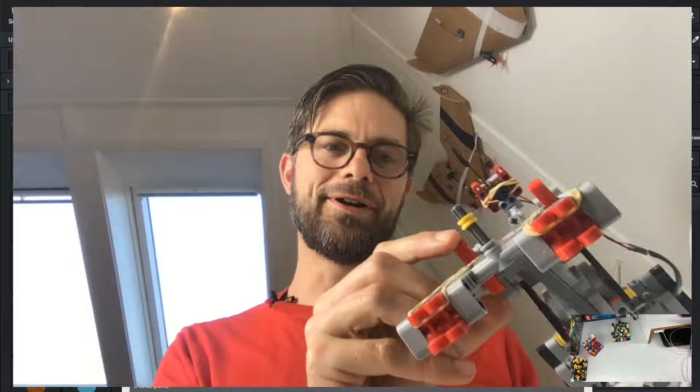We're going to model this bad boy in Studio. It's got these two rubber band cannons that you can fire with a gamepad, and whoops, there goes another one. It's got a camera mount, which is entirely optional but makes for great fun, and there's an iron sight here which works really well for aiming. And of course it's got these aftermarket Omni wheels. They are not original Lego parts, but they make for great movement of this robot. So let's get to it and start modeling this one into Studio.

The first thing I'm going to do is import a palette, and I'm going to import the Mindstorms palette. So I'm going to go not to add palette but to config, where I'm going to import an official Lego set, and I'm going to import the Mindstorms set, which has a lot of parts that are in this robot, so they make it easy to find parts. Now we have a blank canvas here, and let's see if there is a motor in this set.

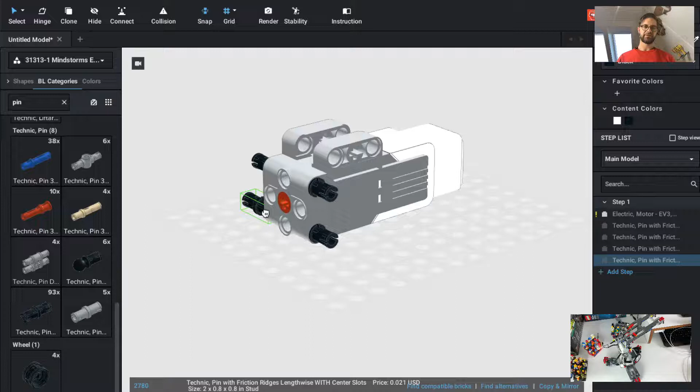So we've got the motor, now let's insert some pins here. Oh, we're in the master palette. Let's go down to the newly imported EV3 palette and find this pin. Okay, let's add 4 pins. So I try to make every step here have one big part and then some pins, and then it's time to add another step.

So I'm pressing Command T, I'm working on a Mac here, or it's Control T on a Windows machine, and now I can add more beams. So let's add a lift arm. Beams are called lift arms in Studio. Let's add a lift arm here, and Mindstorms has them black, but in this model here, you can see in the bottom right, everything is actually dark bluish gray. So let's make it dark bluish gray.

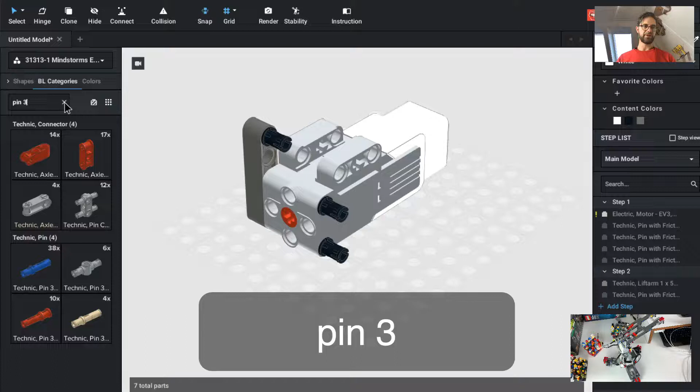And then so again do the same order, first the arm and then some pins. So let's clone this pin here, and let's add a 3 long pin. So I'm typing pin 3 here and adding it.

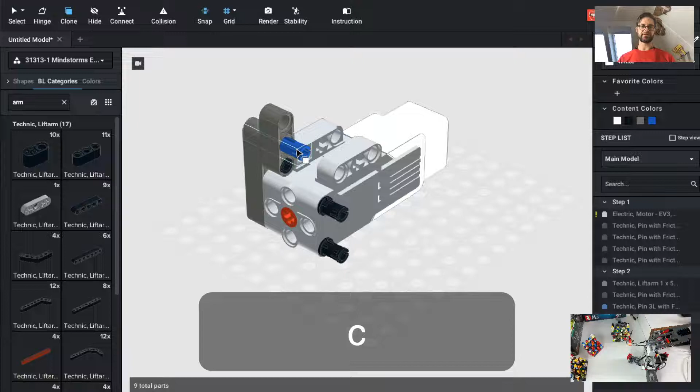I think it doesn't matter. It doesn't matter. So let's make this one dark bluish gray too. So as you start adding parts, this becomes a really nice palette. So we added an arm, then it's time, excuse me, for some pins, and after adding pins I'm going to press Command T for a new step.

Now I'm going to add this angled arm. It's a 3 times 5, 3 5. Yes, that's the one I'm looking for. Turn it, rotate it, okay, it's fine now. And it's not the right color, so let's make it dark bluish gray. And let's add the pins here.

And time for another step. Clone this one and add a pin. And another step, and add a pin. So the next thing we're going to do is add the axle for the motor. So we're going to look for an axle of length 6.

There we go. Then we need a bush. It pays to memorize the names of the parts a little bit, so you can get to them real quick.

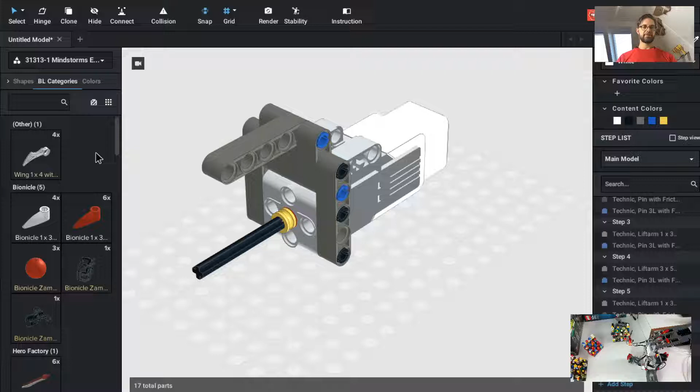That's about enough for a step, so let's add another step, and find a wheel.

Now in reality, of course, I'll switch over to my model. In reality, we don't have Mindstorms wheels, but these Rotacasters or omni wheels. So I'm going to input weirdly colored Mindstorms wheels just to remind us that we need these in reality.

Okay, so that's a wheel, and let's give it some crazy color. Let's make it bright pink. And add a tire here. Let's make that one bright pink too, so we know we have to replace them.

Then it's time for more blue pins. So we're going to build the bracket all around the tire, and we're going to use a lift arm like this and a pin connector.

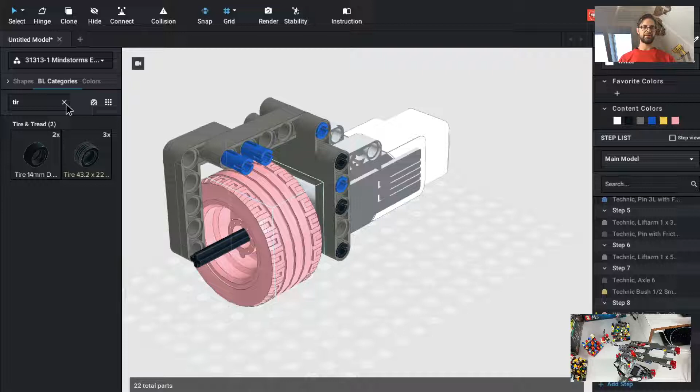The nice thing about importing sets as a palette is that you have the parts in the right color directly, because if I'm looking for a pin connector in the master set, I'll find a lot more hits and they'll all be white. So if I'm taking them out of a set, I'm sure they're in the official Lego colors.

And then here is a trick. So this is the bright red that I'm using for the bracket. I'm just putting in a part here to make sure this content color shows up, and then I'm going to color my lift arm, which is red on the real model. Color it red, and then I'm going to delete this again.

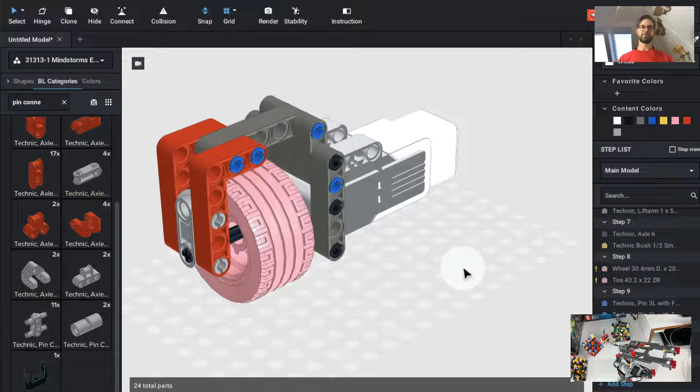I've forgotten to... it's okay. Yeah, this is probably a little big for one step, so let's switch that over to another step, and voila. So this is about right for a third of the robot now.

Next it's time to add some beams. I think they are 9 long beams here, and I have connected the beams with these pins.

Let me find them. In the real model it allowed me to mount it, to assemble the whole thing together, and this looks a bit weird, but it'll make sense later when I slightly change the order to make it all buildable.

So next I need an arm. It's a 9 long arm, that's about here.

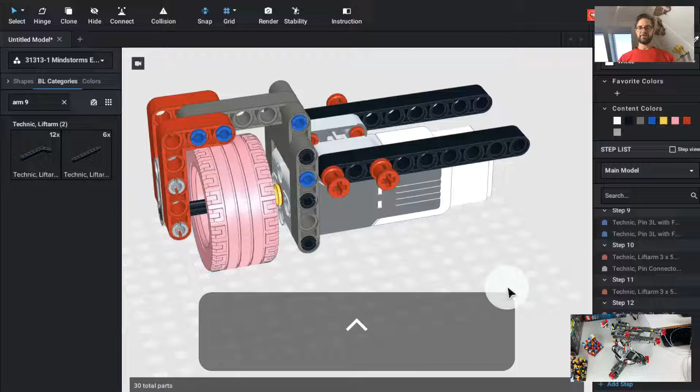Finally we're going to, oh no, not yet. Now we need 2 L-shaped pieces. Let me see how they are connected. Okay, there is 1 space.

This one is probably a little too early, so I'm going to remove it for now. And I think I'll remove these again too and add them later so they show up in the right steps.

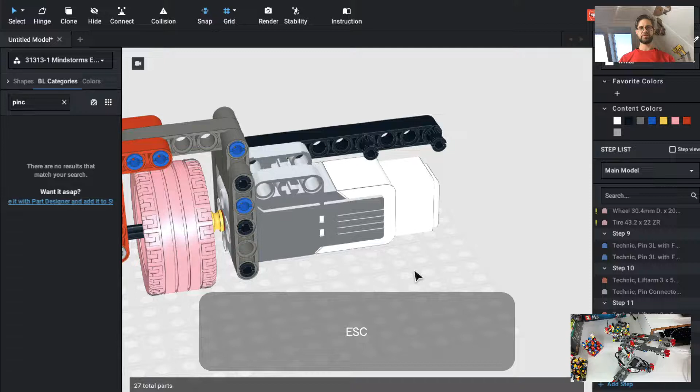Let's find it. Oh no, we don't need a pin. We can just clone. I'm pressing the C key here, the C for the clone tool, and I can clone these pins. Oh, I want this one. Light bluish gray too, by the way.

And then I want another L beam, so I'm going to press C for clone again. Oh, let's rearrange them first. Cool. Now we can clone this safely.

Like that, and the rhythm is beam, pin, pin, so let's add some pins here. Pin, pin. Is that right? Was that my construction? No, it's actually wrong. They're the wrong kind of pins.

I need the pins in the right style. Let me see, do I have another set where they are included? Yeah, they are these kind of pins that should go in there. Let's add this one, and let's add it like this.

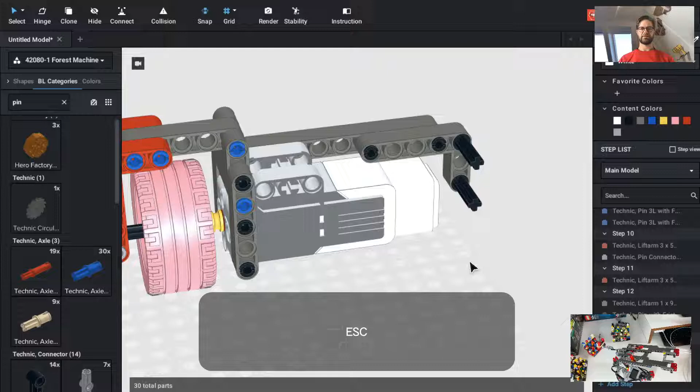Now let's go back to our Mindstorms set, and yes, that's the one I'm looking for. Here, this red one is exactly the right connector. Now I've made a step again. I was too enthusiastic with too many pins here.

What I'm going to do is something different. So let's make this into a... we will never be able to assemble this. We're going to do it differently. From here on, we're going to add blue pins.

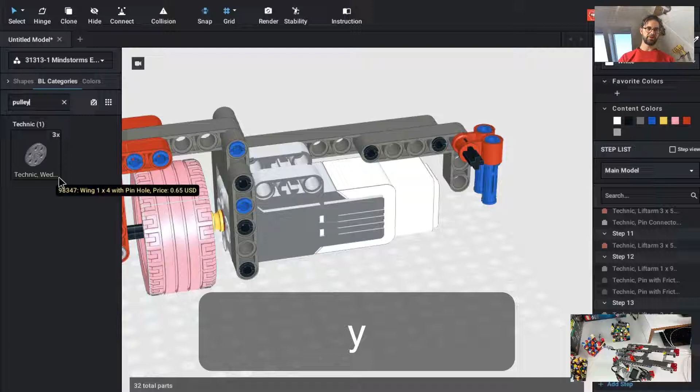And then a pulley, I think it's called. Pulley. Yes, that's the one. So it's a pulley. And there are actually two of them on top of each other. We're going to clone this. Now make this into a little submodel first.

So the user of the building instruction will be prompted to assemble these two parts first, and now we're going to clone it and turn it around and connect it to the model like this. I think we have made some alignment mistakes.

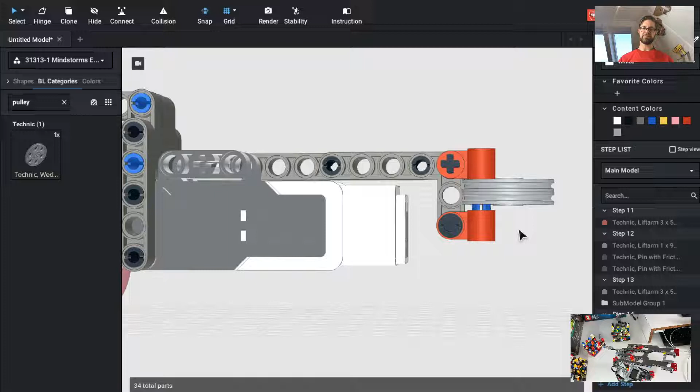Oh no, it's okay. This one could be a little down. So I'm pressing the T key here where I get this transform tool. And I see that my grid is pretty coarse, so I'm going to use a finer grid to put these into place. It's still too rough. An even finer grid. Yes, that's where I want them. Okay.

Pulley. Let's add some more blue pins, because we actually need 6 of them all around, because the nice thing about these pulleys is that the holes are spaced in 120 degrees or 60 degrees per hole, and this is a nice basis for our rotocaster.

Hi Connor, nice to see that you joined, and hi Joshua, thanks for joining.

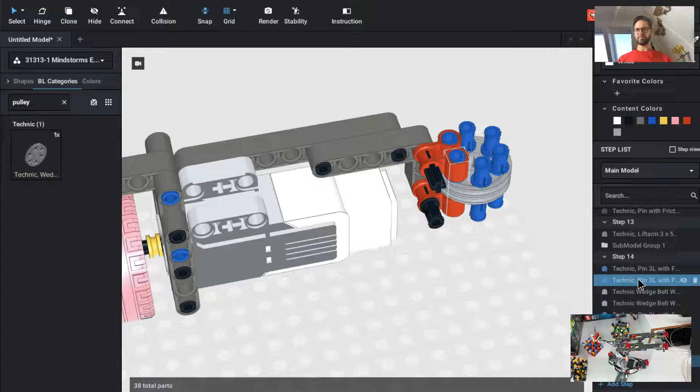I think it's about time for a new step. So we have these pulleys with 6 pins in them. They make for one fine step, and then we're going to add these things, these little submodels. I'm going to add both of them in one step, make another step, add 2 more, see if I can align this.

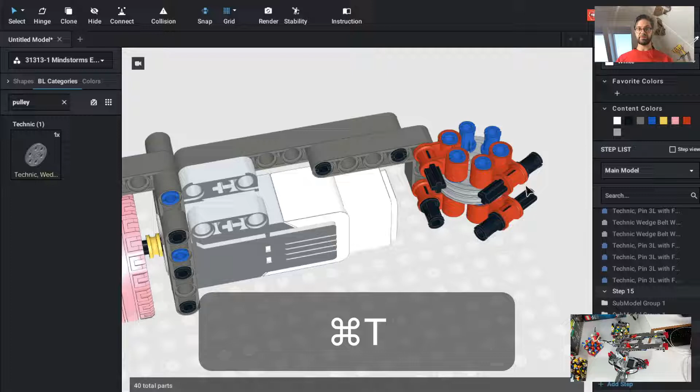Now I'm pressing the R key for rotate, and I'm going to rotate it to a whole number. Yeah, I think it's about right. I'm going to make another step and then clone these again.

Oh, it lost its 60-degree angle. Let's maybe clone this one, try and flip it around. No, it doesn't want to flip in exactly the right way. So I'm going to use this one as a clone source, and rotate it in place.

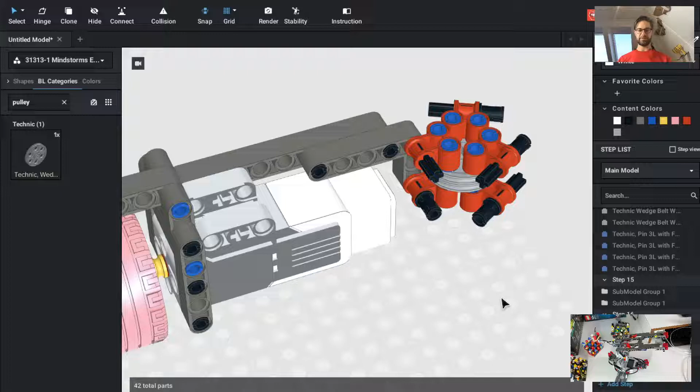60 degrees, that should be about right. Okay, so these are all set, and then we can continue this one, this L beam. Let's add another one, and now we're back into the rhythm of beam, connector, and then new step, this one. Okay.

And I now discover that I forgot to combine our first assembly here into a submodel. So I'm going to select it, make sure that these beams aren't part of the selection. Yeah, so this is the first part. It's a repeatable part, so I'm going to create that into a submodel, and I'm going to call it motor assembly.

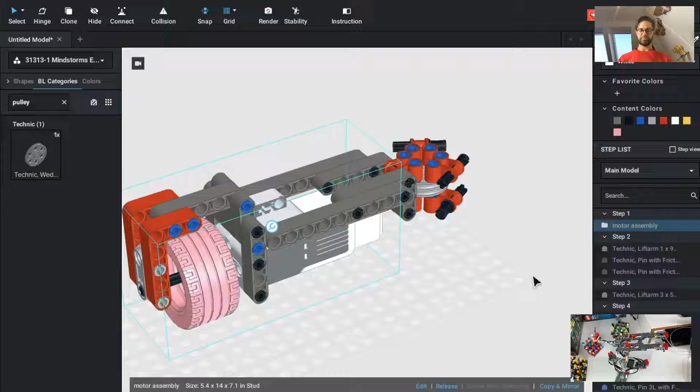Okay, and actually about now is the point where I'm going to add this assembly, so I'm going to rearrange it right away. We'll end up with an empty step at the beginning, but that's fine.

And actually we can make these into a submodel too and clone them all around. That will really shorten the building instructions. So let's create them into a submodel. I don't usually name all my submodels, and let's create this one into a submodel too.

Okay, so then after building this, I can start building that, and we're just going to clone it. Let's see, where is, okay. We're going to clone this one first. So in this situation, it automatically aligns nicely.

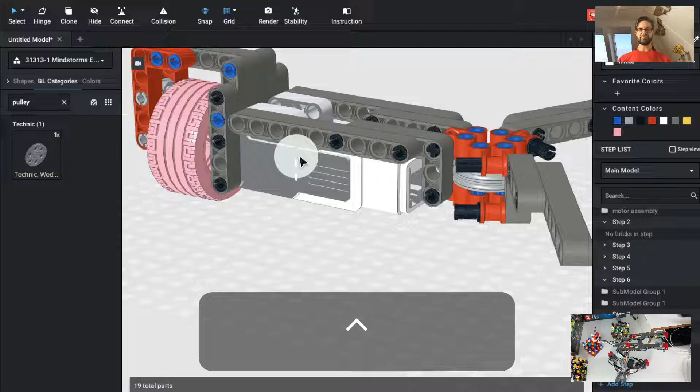So if you clone 3 identical sub-assemblies in one step, in the building instructions, I can actually show that it will instruct you to make this submodel thrice. So let's do the other one first, and then I'll switch over to building instructions real quick.

Okay. Now let's show you what happened here. Here we are instructed to build this assembly thrice and then add it to our central hub, and then we'll be instructed to create this assembly thrice and add that to the central hub. So this really simplifies the building instructions.

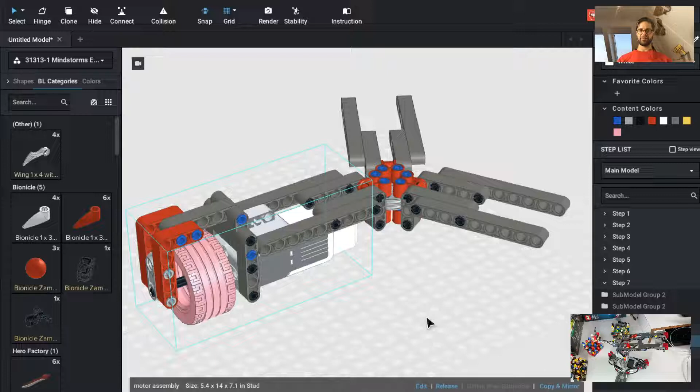Now is a good time to add the motors. So this one, let's - oh, I could have just dragged the step including the model to the end. So, and in this step, let's remove step 9 for now.

Now I need these 3 long pins to actually connect the motor. Let's do that again, and I can just - while building the model I can do the pins first and then the motor. In the building instructions it won't matter because it's all inside the same step, so the user then has to figure out the best way to add these parts.

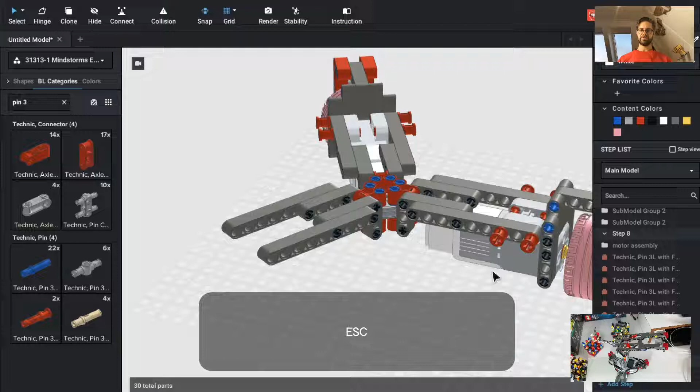Okay, so now we already have about 2/3 of the omni-robot. I'm pressing to drag it around. I'm pressing shift and dragging here. And the last one is going to be - the third motor is going to be a little different. It's going to be assembled with these pins.

Oh, I think actually for ease of use, because these both are angled and I won't be building much on top of them anymore, I'm actually going to move this motor over here, and it'll save me a lot of trouble later on. When I add the EV3 brick, it will be orthogonally aligned to the floor here, to the grid. So I'm going to move this motor over there, so it will be easier to add the EV3 brain later.

Oops, I cloned it. I shouldn't have. Should have just moved it. Okay. So that's a fine step.

Now the last motor, and the last motor I'm going to put it in a new step because I'm going to assemble it with the blue pins, because I'm going to add some fortification construction on top of it. So here goes the third motor. Oh.

Just trying to snap it in place. Okay, it snapped. Cool. Now let's have a look at the model. So now we have the bottom side of the model more or less, and now it's time to build the brick here on top.

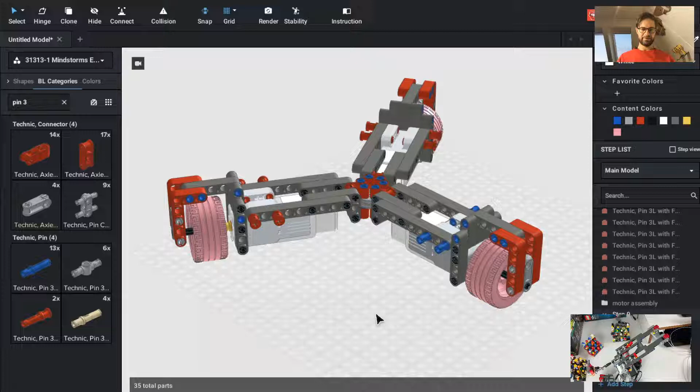I remember when I designed this model that I built the brick with this kind of axle because it has the ability to push it in all the way, and then the round bit will stop it like this. And...

How did I connect it then? Oh, it should actually be in another step, and it should stick one out, I think. Oh yeah, should stick one out like this. Yes. Okay, and let's look at the model.

How did I ever connect this at the bottom here? I guess I'm going to disassemble all of it just a little bit. I put 2 five-long beams in there and a piece. Okay, that's a weird construction, but well, let's stick with it. It works.

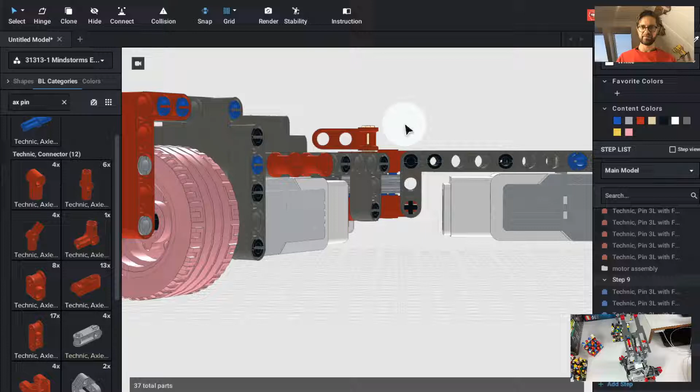Now, because I used an axle here, the alignment is a little tricky. I want everything to be in the right height. Yeah, you can see already that these aren't very well aligned. But I think it will work out, more or less. Yeah, I think it's precise enough for the building instructions. So let's make it light bluish gray and...

Put it in a new step. Add some blue pins. Now we're back into the rhythm of beam, pins, pins. So we're going to add a 5 long lift arm. And...

Next we have to add the frame. So let's add this and that. Okay. Yeah, we could actually have added another pin here. Maybe it'll make the construction a little stronger.

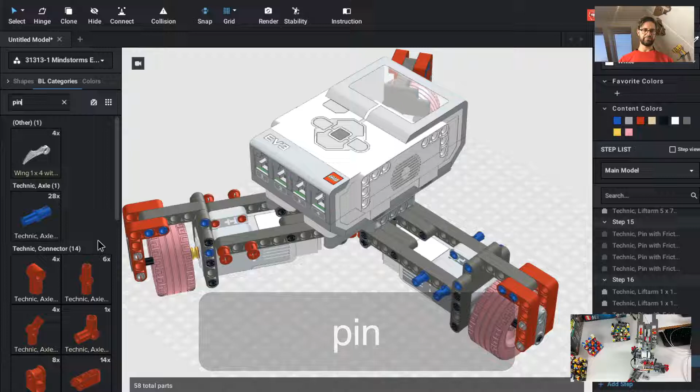Come on, go in there already. Yes, there you go. So we're part pin, pin, pin again. Add another step and have these, going to add these red pin connectors. Okay.

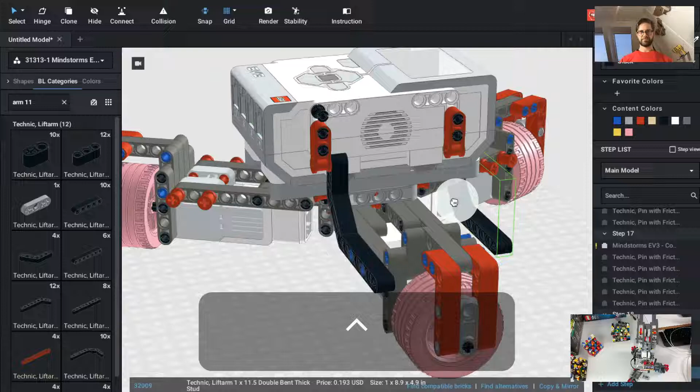And then I'm going to add the big L-shaped beams, so arm, I think they're 11.5. These guys, yes. Oh, rotate it. There we go. They exactly fit in here. That's why I chose them originally. I only have to make them in the dark bluish gray.

And finally I have to insert these little axles here. Okay, so now the brain is connected a bit better to the base. Let's see what the other side does. So let's switch over to model view.

Here I did something to connect it to the base that seemed to align, but I needed a half step there, and it's 10 units apart. So we're going to insert these gray parts first, then build the rest on top of it, and finally use the red axles here to assemble everything, I think. Or maybe, oh no, we can use these parts to assemble it all and just add them for now. Okay, there we go.

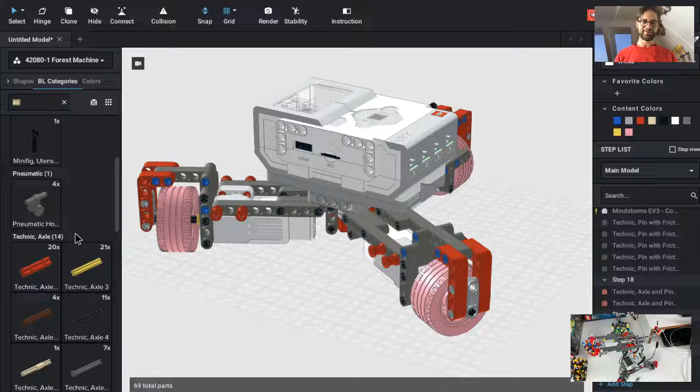I imported more sets, almost all the sets I have, and I seem to have a bit of a memory as to which bricks are in which sets. So this is much easier for me than just searching the master palette. Let me see if I can find this. Yes, that's the one. I remembered it was in the forest machine set, so I could find it really quickly.

Okay, I should have put them into a new step. So let's drag them around to the next step.

It's good to see that you're so enthusiastic, Connor.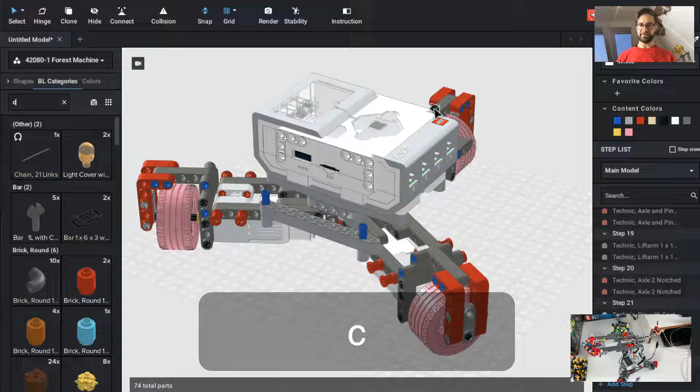And then we need some black pins again, so I'm going to steal a black pin here from the back side, or clone it. Let's go back to our Mindstorms base kit, and we need something that connects axles and pins, with a half step—that's the one we need. Need 2 of them.

What else? Yeah, they will have to be built with sub-assemblies. So what I'm going to do now is insert an axle. In reality you won't be able to do it, but for the building instructions it will be just fine.

Next we need a part like that. I actually wasted some time doing this—I could just have cloned it. Let's align it a bit better. There are some view shortcuts. Yeah, that's the one, I guessed right. So here I can drag it around with shift and everything's aligned. It seems to be well aligned. Maybe this axle could move a little notch in there. Yeah, now everything is fine.

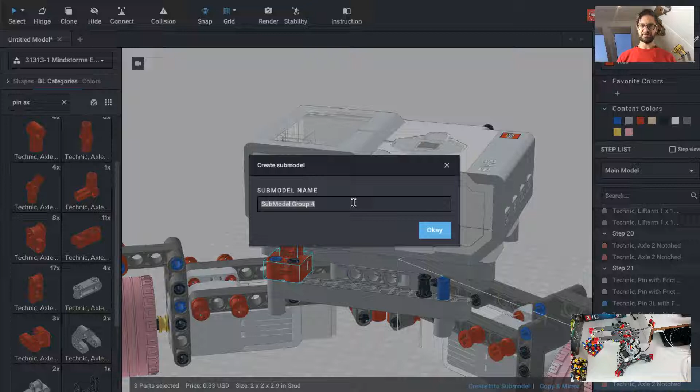So this is a great submodel now, and I'm going to make it into a submodel and clone it. Okay, and then I'm going to put them into their proper steps.

Let me see what kind of pins I put in there. I'm going to put the black ones in right away. And then here I have this very interesting submodel to build that I'm going to snap in afterward. It's built with a pin axle, and a black one, and a half beam. Are there any thin beams? Yes, exactly what I need—they are just in the Mindstorms set. 2 thin beams. And an axle.

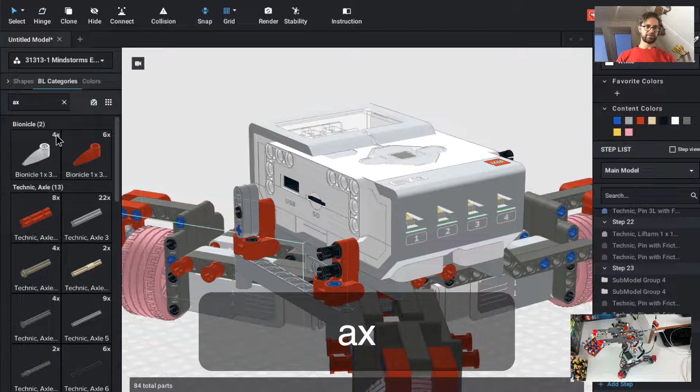Okay, add a step. The fun thing is I can make this part with separate steps here, and when I make it into a submodel it will retain the steps, so that will save me some time too. I'm going to—is it, yeah, this one, that's the one I need. Voila. Beam, and clone the black one.

Now all of this I can select here on the side. Oh, I think for you this model view is on top of it, but I'm selecting all of the parts I just built here in the sidebar, and I'm going to create that into a submodel. So in the instructions, the user will be instructed to build that first and then stick it in from the side.

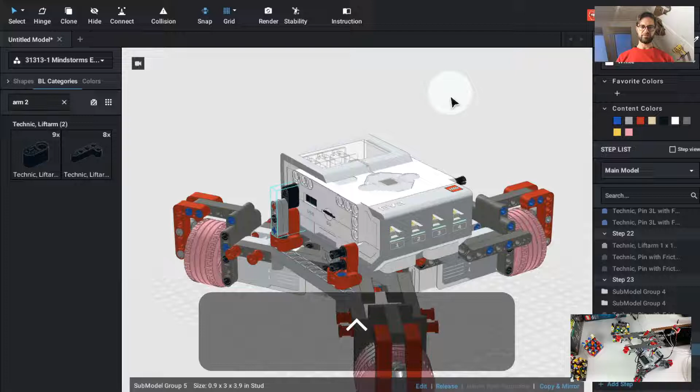I think we're about ready to start with the superstructure now, and maybe it's okay to start building the superstructure from this side. So what we'll do here is add the L-shaped beam. No, let's clone a pin from here.

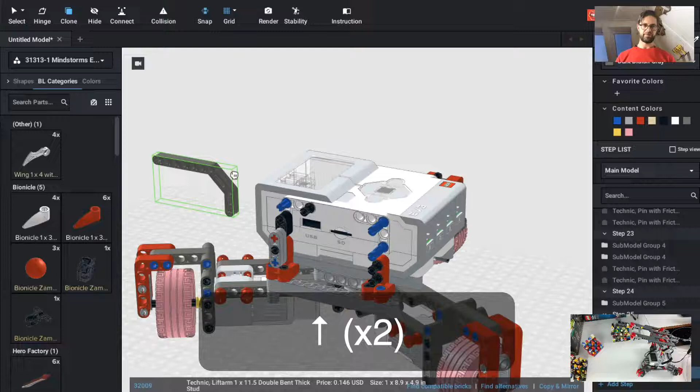And the other pin. And some 3-long pins. Maybe I can clone them from here. Yes, I can—these are the ones I need, so let's clone them. Try and rotate them until they are in the right direction. That's what I want.

And then we need—oops, my Mac is going into night shift, let's disable that. I'm going to need this pin connector that is angled. I'm not going to find it like this, can just scroll. Oh, apparently it's not in the Mindstorms set where I supposed it was, so let's try and find it from the master palette. Pin connector, where are you? So it's this pin, but then angled. Yeah, that's the one, that's the one we need. And we want everything to be light bluish gray.

Voila, and then this one is going to be another submodel, a nameless submodel. Oops, I selected too much—these shouldn't be in the submodel. Okay, another nameless submodel. There is an empty step here, going to delete it.

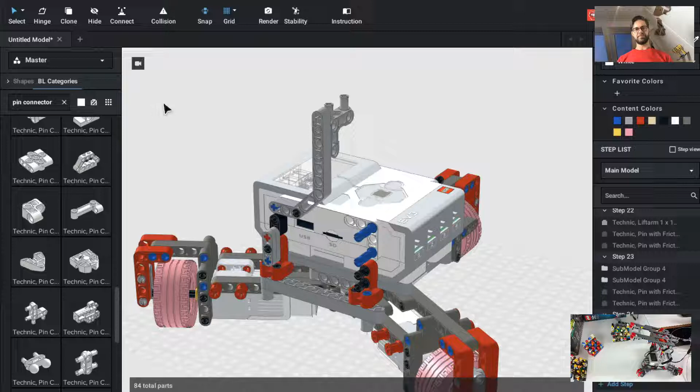So this is part 1 of the superstructure. I think the next one is a 13 long beam. Let's select light bluish gray here, because we're going to use a lot of light bluish gray. No, that's not the one, it's an 11. There we go. And let's seal this up with a 5 long beam.

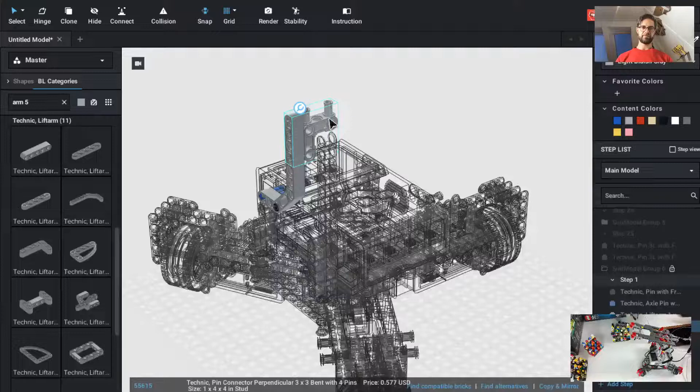Voila. Now this is a bit much for one step, so let's make all of that into new steps. This one can have another one like this. So we can go in there, copy it, go back to the upper model, paste it, insert it, and it should go with the lift arm here.

Now the other side, I think we're going to add 9 long beams. So let's find beams with a 9 length.

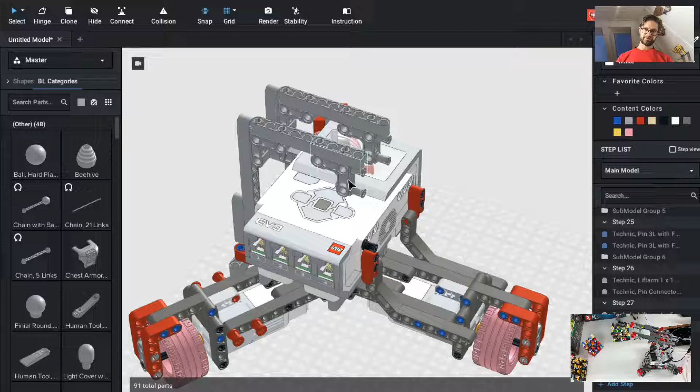But anyways, we were adding lift arms here, and I think in the same step it will be okay to add these 4 parts in one step. I think the average builder can do that. Oops, they shouldn't be there, they should be here, right at the end.

Okay, new step. Then we need a 9 long arm, if I counted well. Yes, perfect.

And we need an almost mirror image of this one. What we can do is copy and mirror it. It will give us this, and the pin connector here is surplus, so I can just delete it here, and I'm still getting this sub-assembly, which is perfectly fine to put in there.

Okay, we're making way with our superstructure here. I think right now it's time to add the big motor, so let's insert the pins to do that. You can clone them from here on the side again. Press the C key for clone.

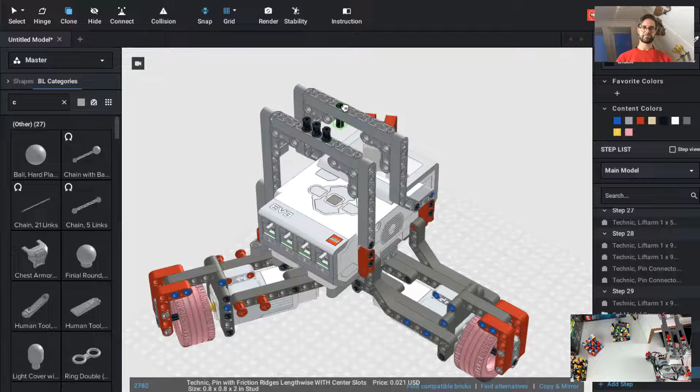Okay, new step, going to the master palette and select white, and find EV3 again, and then we can scroll down until we find the motor. That's the one. Okay, High Pro Skills, welcome to you.

Ouch, this one doesn't align. Let's see if we can zoom in and make it align. Yes, now it snaps. Sometimes it's weird and you have to zoom in and change your view a bit until it snaps. But here we are, ready to build the cannon.

Let's first fix the cannon here to the frame. Let me see, how did I do that? I think I used a 7 long axle and a 15 long beam.

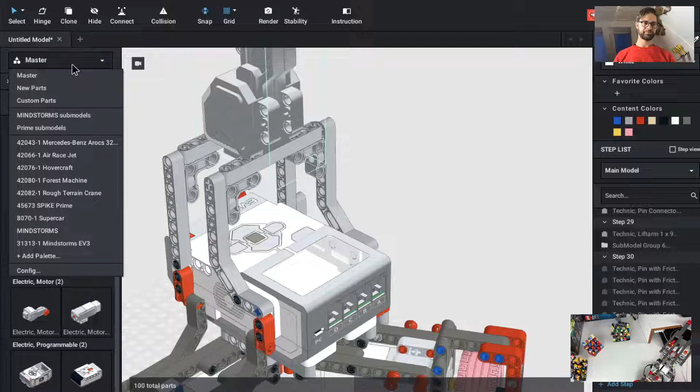Back to our Mindstorms palette. I'll just insert it horizontally and then rotate it. So I'll switch over to the model.

As you can see, right now I'm building this part. So I'm going to start with the axle inside here and this beam, and then I'm going to add these parts because they are connected to the red ones, and I need the axle first. There we go. So I'm just going to rotate it out of the way a little bit for now.

Axle arm, new step. Pin axle, so that's the one. These are the ones I need. Rotate them.

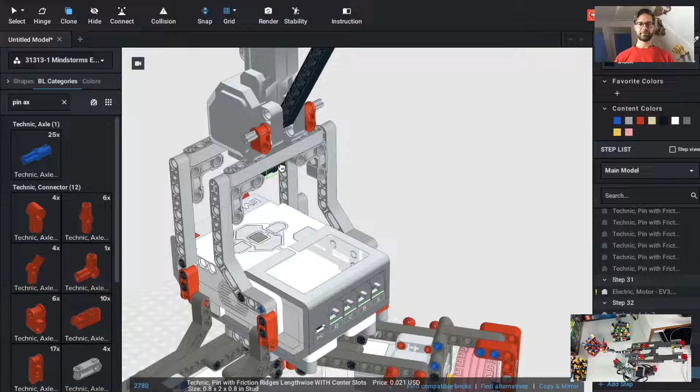A bit of a precision alignment. I wish the grid was more helpful here, but somehow for the Mindstorms model it doesn't really work. Then we need some black pins. Let's clone one from down here again. New step. I think I used 5.

This is actually, I will make it into a submodel again, so I will build it only on one side and then clone the whole thing.

So let's make more pins. I need a blue pin, a long one, to go in here, and then I need another arm. And in my design I use the red one. You can of course use any color, I just like red here.

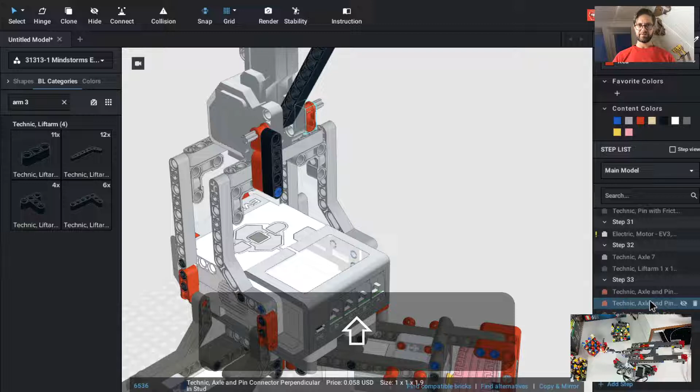And then I can clone all of this. Clone all of this and first create it into a submodel and then clone it, and voila. Now the motor is connected to the base.

What else are we going to do here? We're going to, yeah, I think I'm going to start here on the back for the gun assembly. So let's switch over to the model again. So I think the next thing to do is build this thing on the back, and then when I've built it out wide enough, I can connect these half beams and the rest of the superstructure.

Let's see, where do I start? I really forgot how I built this, so I'm going to take it apart.

Yeah, that's about far enough to see what I did. Okay, new step.

Let's find a blue pin to start. Okay, next is a beam, a lift arm. That is a lift arm, and this lift arm, oh, this one should have been in the next step. I decided to take a gray lift arm there, like this.

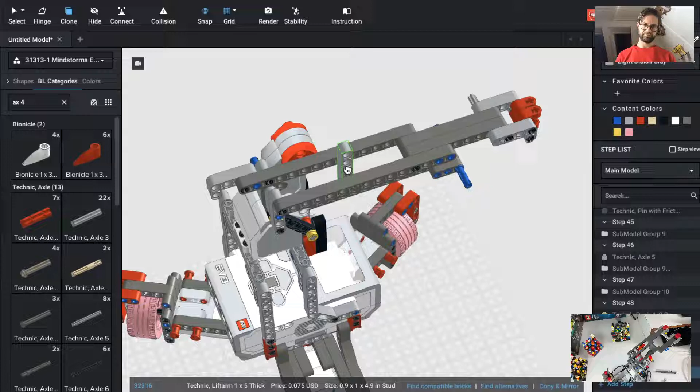Press the T key to move it into place, and press the C key to clone the bush. Okay, the steps will be ordered wrong, but we'll fix that later.

Yeah, I think right now we can go on to the other side. So let's make a new step and clone everything to this side.

Oh, accidentally. Okay. No, that was not the right thing to do. First, we need to build the cannon holder. So I'm going to clone this.

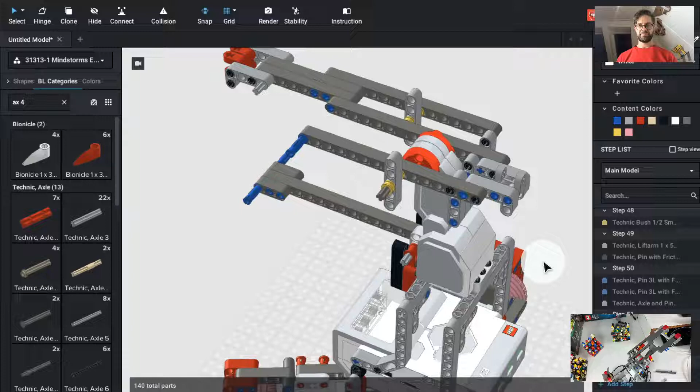Let me think, what's next? Oh yeah, the gray L-beam. So, new step, more blue pins.

I should have made a new step. A new step, again here. Come on, it doesn't snap. Yes, there we are.

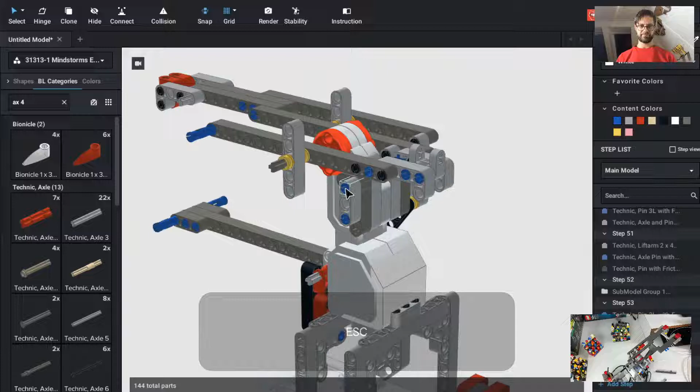New step, clone our three long beam. So this half of the model goes much faster. Add a, oops, not this one. Add a blue pin. And, oh yeah.

New step, build up this part again. No, too fast. We should have made the X pin connector first here to build our iron sights.

Okay, there we are. I like to have this one in gray, and I want another X like this. No, just not clone it. I need to copy it, then leave the submodel and then paste it in the supermodel.

Yeah, that should have been a new step, I guess.

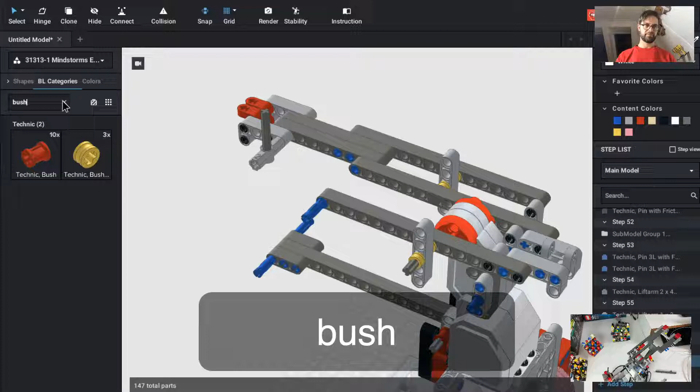Now we're going to use both a gray bush and a yellow bush, and the gray bush will fix it in place and the yellow bush will be our sights.

Okay, and then we can add a new step, add in a 5 long axle. Make a new step, and now it's time to build up this side.

Oops, no, not yet. I should have copied this one first. This one can actually go together with the axle. Finally, this beam.

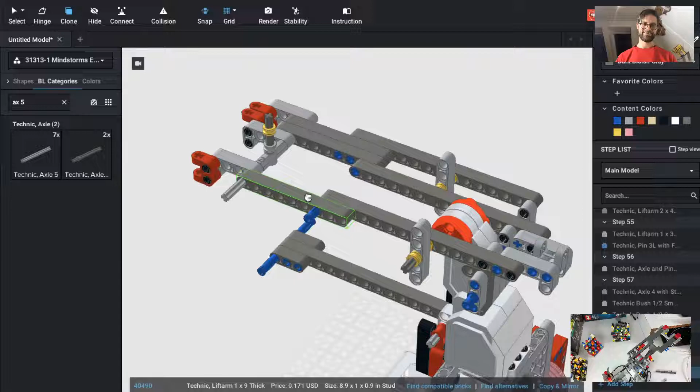Was that a black one? No. Let's move this one back slightly. Add the black pin that should have been there. Okay, and the black pin should be in the previous step. Cool, now some blue pins.

Another 9 long beam. Oh, I forgot to make a new step. So let's drag it into a new step. A black pin is a good thing to insert there.

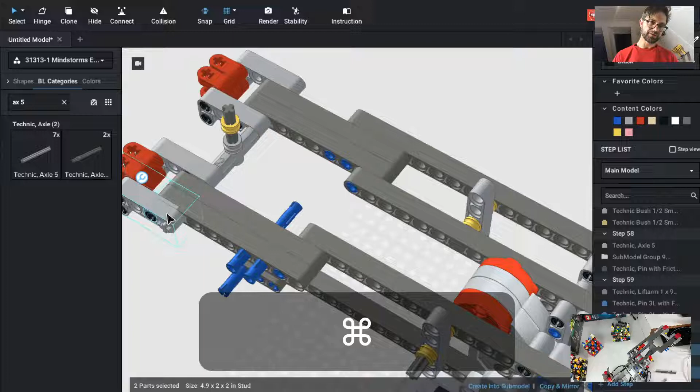And then we can go for a new step and a clone of that part. Yeah, it should snap. I wish it would snap better. Ah, I guess my black pin wasn't positioned right. Okay, yes, there we go.

And then finally, I think we will copy, clone this here. There we go.

And now we have a problem again. Let's solve it later. X6, let's first input this camera axle.

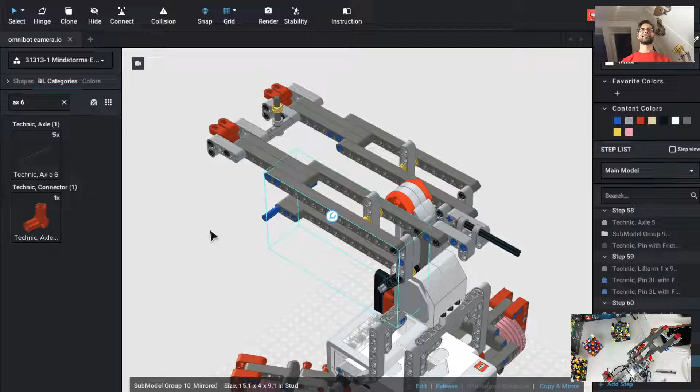Now we have the problem that these things here can't rotate anymore because they're in a submodel, and I need to rotate them. What I'm going to do is save my model. I hadn't saved it ever, that's pretty risky. And see if we can release it and release that one, and then see if we can rotate it.

Nope. Nope. Awesome, the whole thing moves. Okay.

How far up should it move? It's about this far. Okay, now let's rotate this one. This sucks.

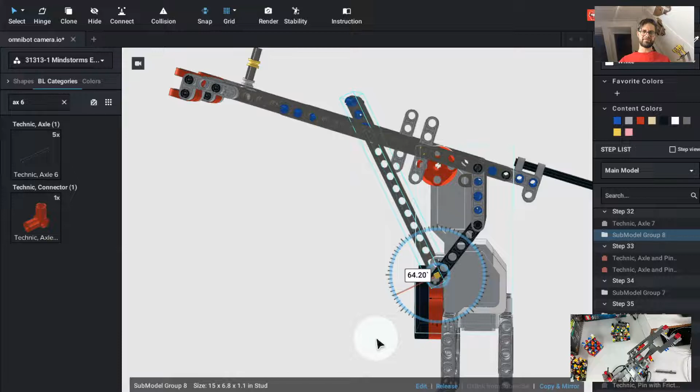Let's take a side view first. Not this kind of side view, that kind of side view.

Now where did it go? Oh yeah, it went into the backmost blue. Oh, we went up too high. Yeah, I think it will end up there. Let's rotate this one again.

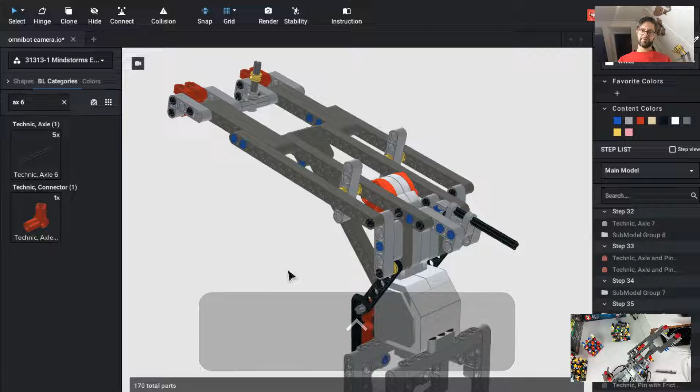Okay, and then I see another mistake here. I wonder what happened. This one should have been there. Okay.

Okay. Looking good, it's already starting to look like the virtual reality robot that we wanted to build. So let's compare it to the model for a bit.

So it's looking pretty much like it. So now we need to make this part of the trigger and the camera cradle, and then we'll be done. So the last bits, and we've been modeling for about an hour and a half now, which I think is a fine amount of time.

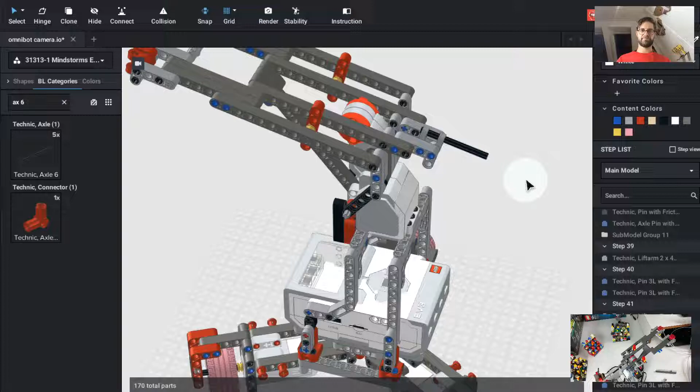Good. Oh yeah, I prefer these to be red. What's next? Oh yeah, a little bush here would be nice. And the camera cradle.

Step. Was it the number 4 that I used? I used the number 3. They aren't in the Mindstorms set. Axle pin connector angled number 3, that's what we need from the master palette.

Let's make it light bluish gray. Axle pin angled number 3, that's what we need.

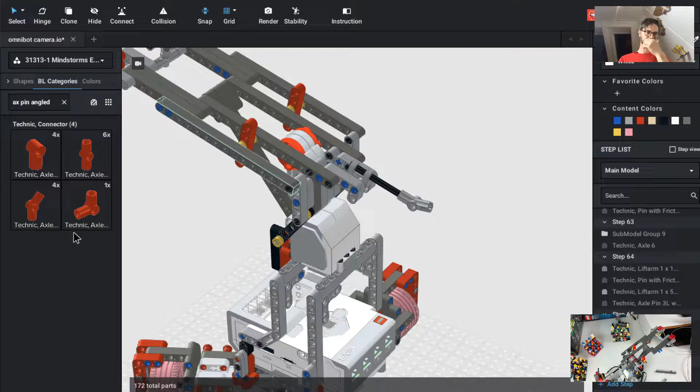And now we kind of go back to Mindstorms, because we need a 2 long axle. Okay.

And then I don't know the name of this part. What's it called? Axle connector with axle hole. Well, whatever. Oh, I should have put this one into a new step.

And edit all, copy, paste it here, and it's a gray one, and all of that should have been into a new step.

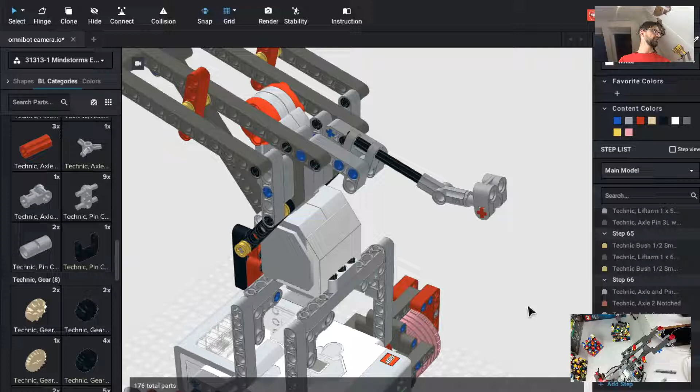Yes. Nope. This one should go out. These two should be in the same step. Yes. 2 blue pins.

Ah, they're angled, so that's not so very practical. Let's clone them from somewhere else. Let's clone them from here.

Okay. And let's add some pins.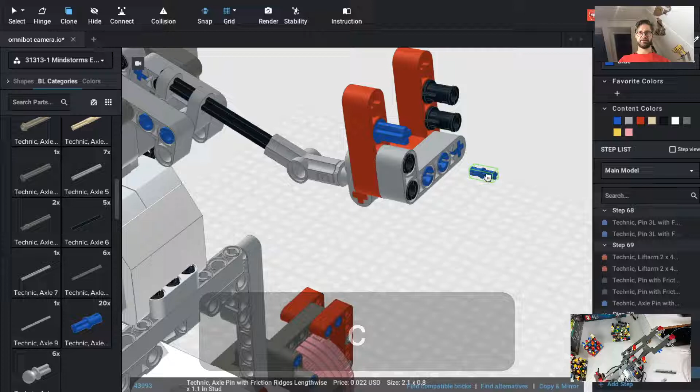Now let's make more pins in there. Copy of this one. Okay.

Almost there, and then from the master palette we need a pin. Is there a half pin? Pin with a stud. Oh, what's it called? Yes.

Okay, and then finally we need a tile, I think it's called 2x2, and a 2x2 tile. That finishes our camera cradle.

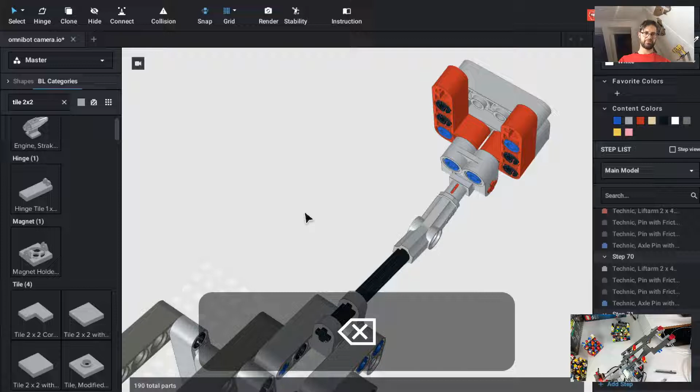Oh. Okay. Hey. What's this part doing there? It's accidental, it's an accidental clone.

So that's the camera cradle, and finally it's time for the last part of the trigger mechanism. And the trigger mechanism is actually built around a 12 long axle. An 11 will work too, by the way. Oh, let's put in an 11 for the building instructions.

It's the support to try and get it into the motor axle hole. There we are. Translate it into place.

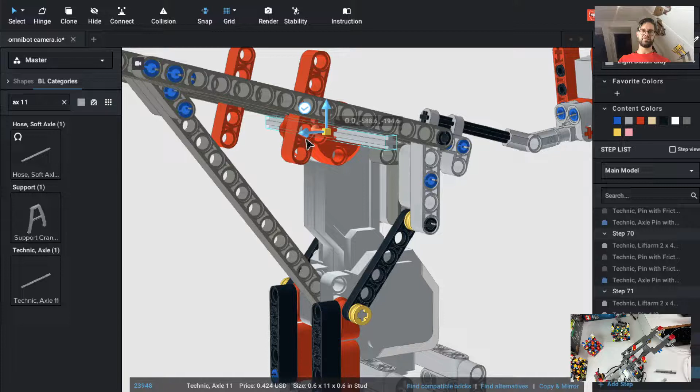Let's see, is it about in the middle? Nope. Now it's in the middle. Okay.

We're going to add some bushes next. Red bushes are fine. And then

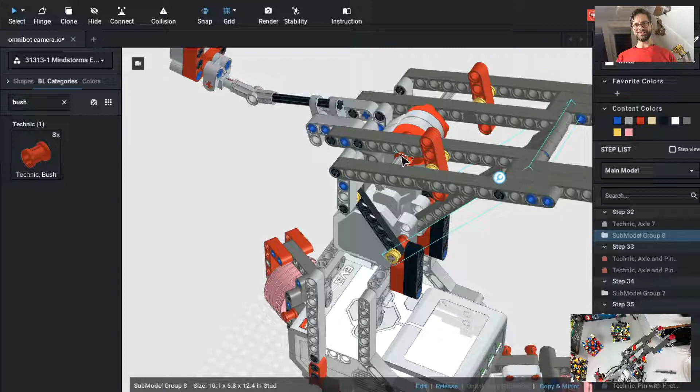I can see I made an alignment mistake, because it should actually be a bit higher. Now I can see that this crosses through the beam, which it doesn't in reality. So what we'll do is take this one out for a bit.

Let's see if we can still rotate this. Yes, we can. See if we can rotate this one now. Yes, we're lucky.

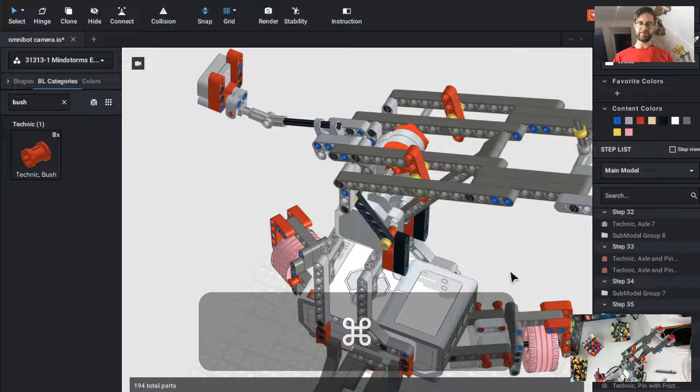And it should go about there. It should still go higher. Let's rotate it even slightly higher.

This looks good, fine, okay. Now let's finish the trigger mechanism now with another step, and

in the master palette it's a thin 3x3. Does it exist? It exists. That's awesome.

And now this is getting confusing, so I'm going to hide it and hide this. Okay, so I can build this quietly. Yes.

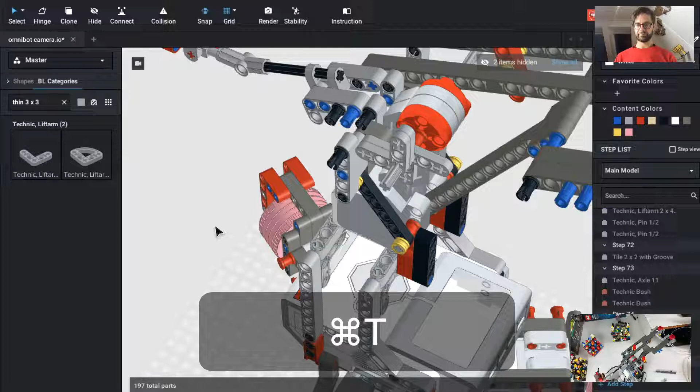Next we need some of these small axles. Can I clone it? Yes, I can.

Okay, and then we need this lift arm with an axle hole in it. This one.

That wasn't quite right. Okay. And they should have also been into the next step. Okay.

New step again. Finish it up with a clone of that one. There we are.

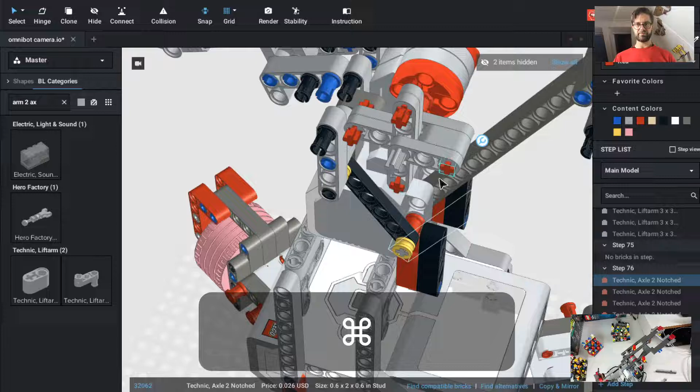These aren't right. Okay. This one is out too far too. And we'll also add some bushes.

New step. These should be gray bushes. There we are.

And yeah, this is going to be our rotating trigger. Oh, let's delete this step. Where did we start? Bush, there.

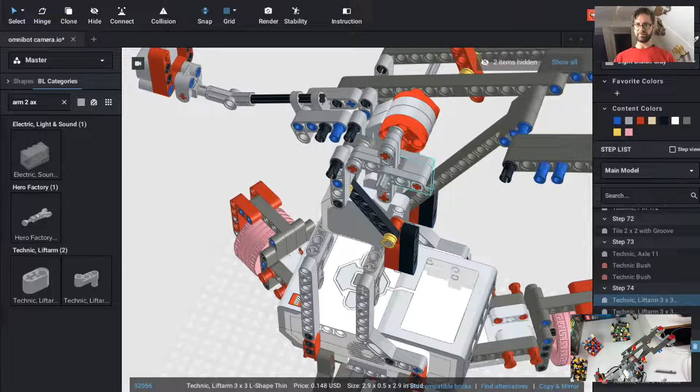That's where we started. So I'm going to make this into a submodel for later. For now, I'm just going to clone it right away. It'll be more user-friendly. Okay. And then finally 2 more bushes.

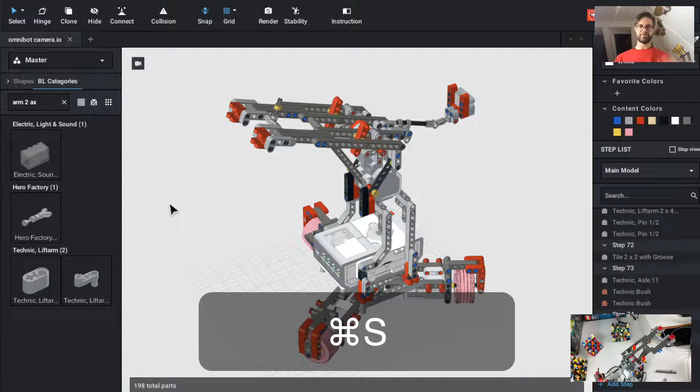Show our hidden items again. Okay, I think that's it. I think we finished building the model. Now it's completely into Studio.

Let's rearrange some steps here, so now you can compare it to the real model. Let's save it and go over to our page design.

I'm not going to do the whole page design here on this live stream because this work is really tedious. I'm just going to show you some steps of how I work. You can easily switch between page design and step editor here. I'm going to delete this empty step, go back to page design.

And here we go, that's a nice first step. Build 2 of these, add them, build 2 more, add them, build 2 more, add them. This seems reasonably easy to follow. The page design is generated quite easily if you pay attention while constructing the model in the modeling part, to make some reasonable steps.

Okay, there we are, this makes perfect sense. We're building 2 motors, this is still making perfect sense. And I'm lucky I don't have to change rotations very much, so I could drag this from down under.

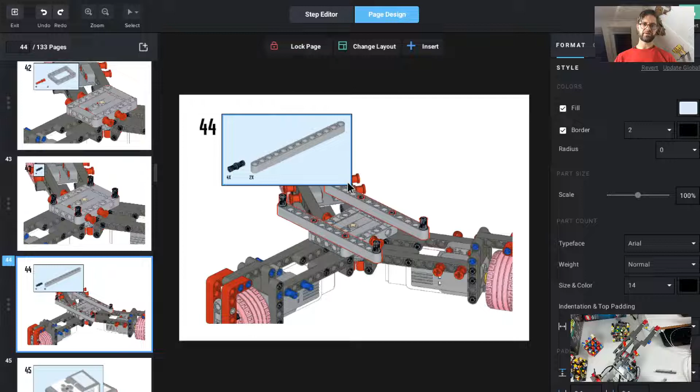What's cool is that all of this, we've been able to build without ever changing the view rotation, because view rotations are always hard for people using building instructions. I'm going to scale this down. So, oh wow, still no view rotation - that's really awesome.

Let's put that over there, 2 of these lift arms. I guess we should add these lift arms first, because you won't be able to snap them in place when the red parts are there. So let's go to the step editor and switch around these steps. Go back to page design - yeah, so first these arms, then these.

This makes a lot more sense. The little red axles, you can't see them.

So what we can do here is activate buffer exchange. Yeah, somehow these arrows don't work, so when you activate the buffer exchange, you have to type them in manually. I'm guessing it's going to be Z - no, I guessed wrong, so you have to guess that too. Y then? Nope, so it's X. X, 0, 0 - it was minus 100 anyway. It's easier to put it in there from the outside.

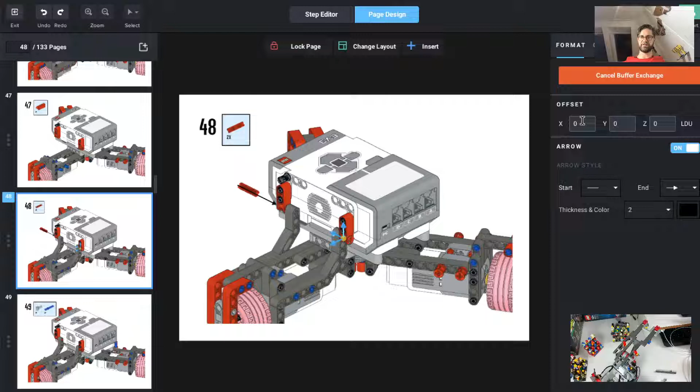And let's activate the buffer exchange here. Okay. It's a weird name, activate buffer exchange, but it means temporarily taking out parts.

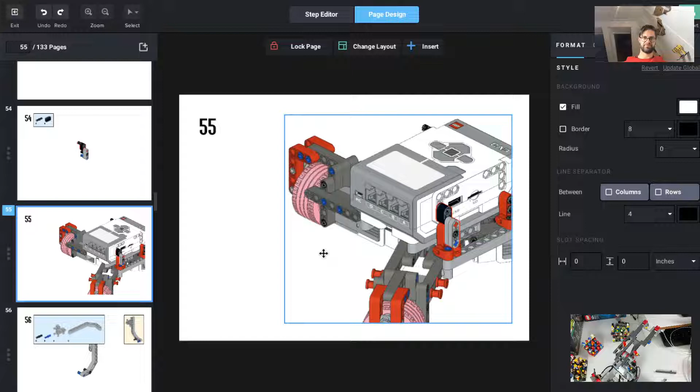Still looking good, some overlap here. Yeah, this is quite a lot for one step, but I think people will be able to figure this out, and so on and so on.

Okay, I think this concludes my tutorial video and my live stream about making building instructions for this VR camera streaming robot with Omni wheels. I hope you learned a thing or two about making building instructions, and maybe you'll make a copy of this robot, and I hope you'll share a lot of building instructions to other people online. So it's been a pleasure, and hope to see you again on a next live stream.